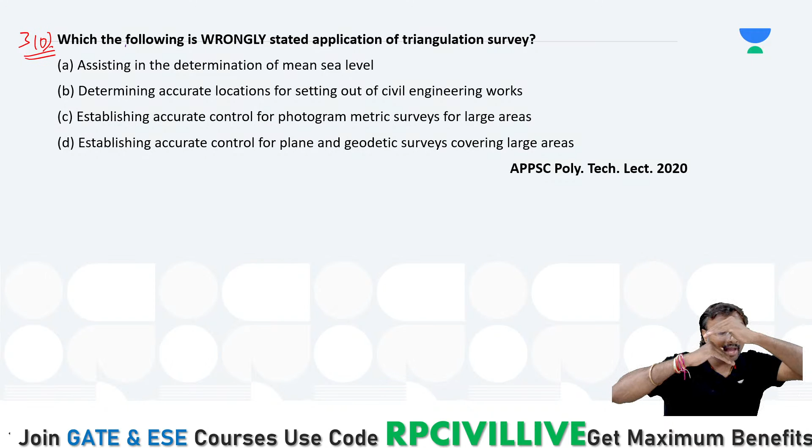Collimation surface is nothing but related to this line of collimation, right? The surface in which this line of collimation is lying is called your collimation surface, right? Anjanelu, the surface in which the line of collimation is lying is called the collimation surface, you can say, if you just observe, isn't it?

Assisting means helping. Assisting means helping.

Okay, so here if you just observe this, okay, first answer this question, I'll go back to that, okay, don't worry. First answer this question, everyone, I'll go back to that, okay. Anjanelu, answer this question first, I'll go back to that, okay, don't worry.

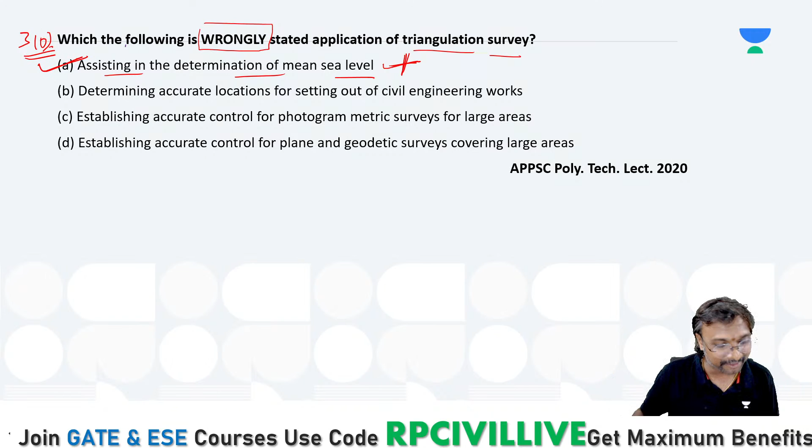Sorry. Are you going to determine the mean sea level, or with the help of mean sea level? With the help of mean sea level, we are going to find out the reduced levels, right? Using the mean sea level, we are going to find out the reduced levels, right? Are we going to find the mean sea level, everyone? Mean sea level, nobody is going to find the mean sea level, is na?

Nobody is going to find the mean sea level. Already that is existing, is na? With the help of this mean sea level, we are going to which one? This we are going to get others, is na?

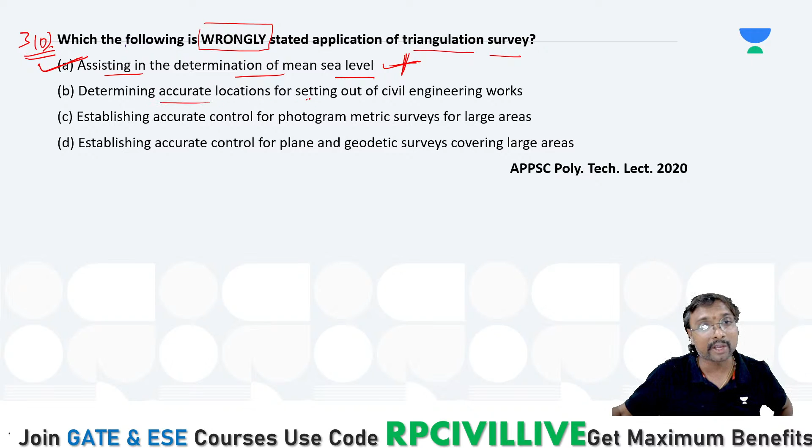Determining the accurate locations for setting out civil engineering works, yes, absolutely. Establishing the accurate control for photogrammetric surveying for large areas, yes, absolutely, photogrammetric. Establishing accurate control for plane and geodetic survey covering large areas, yes, absolutely, it is also correct, right? So which one is wrong then?

Assisting in determining the mean sea level, right? Are we going to determine the mean sea level? No, nobody. With any kind of leveling, we are going to calculate, we are going to estimate the levels, reduced levels of each and every point using the mean sea level, yes, na? So mean sea level we cannot determine, it is already existing.

Now here mean sea level is nothing but, you are right, if you just observe, this is your level surface, you can say, right? This is your horizontal surface, right? This is your which one? This is a level surface.

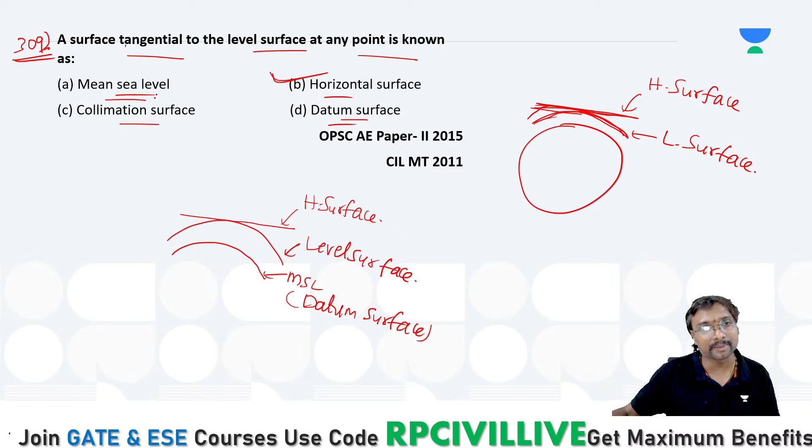Collimation surface is nothing but, whenever you are keeping the instrument here, this is a line of collimation. Whenever you are observing through this, through your eye like this, this is your line of collimation. The surface in which your line of collimation is present, that is your collimation surface, if you just observe, isn't it?

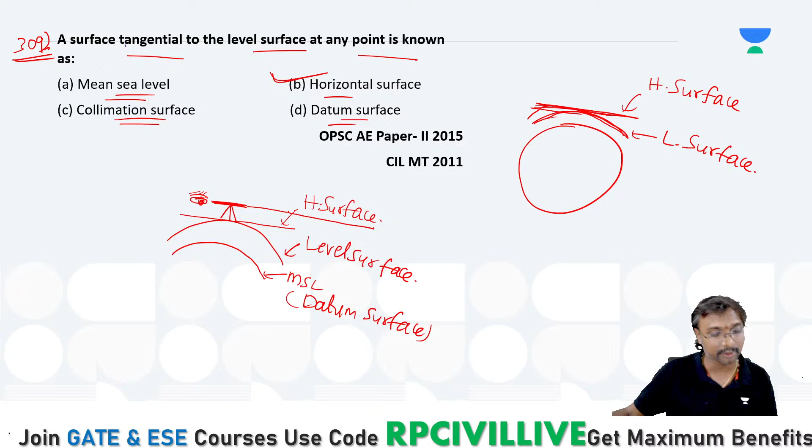Like that, Anjanelu, is that clear? Let's select the answer for this 311 question.

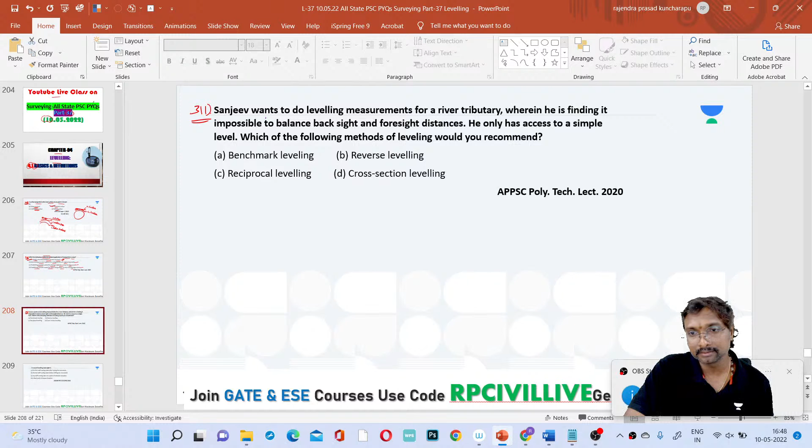Is it buffering? Now also it is buffering. One second, one sec. Now check it, everyone. It is working. Now it's working, everyone, just check it. Now it's working or not? Yes.

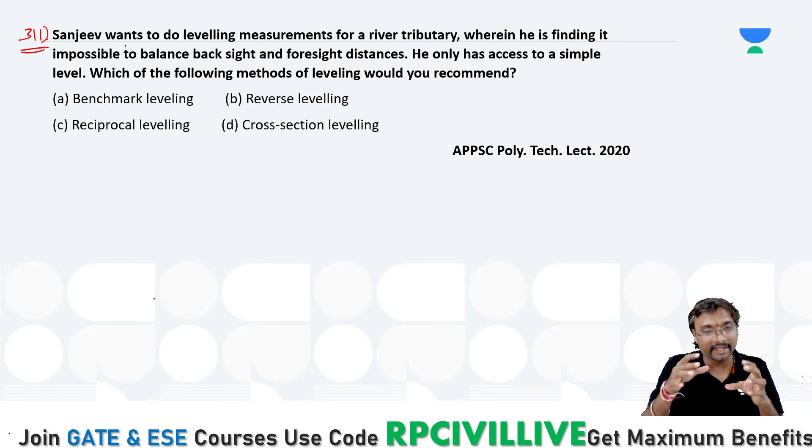Yes, it can be tangential to both the horizontal surface and level surface. Horizontal surface is nothing but, wherever you are standing, with respect to the earth, always it is horizontal. So now select the answer for this question, all of you.

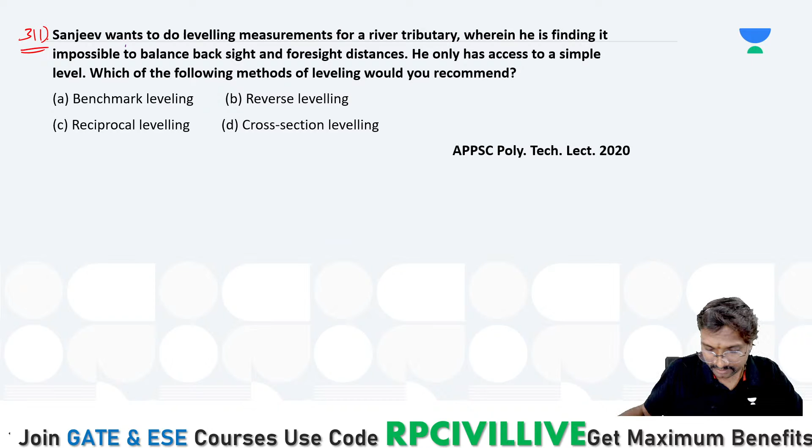Now it is okay or not? Now it's okay or not okay? Select the answer, all of you, if it is okay. You are getting sound disturbance also. Everybody is getting the sound disturbance. Is everybody getting sound disturbance, all of you? Is everybody getting sound disturbance?

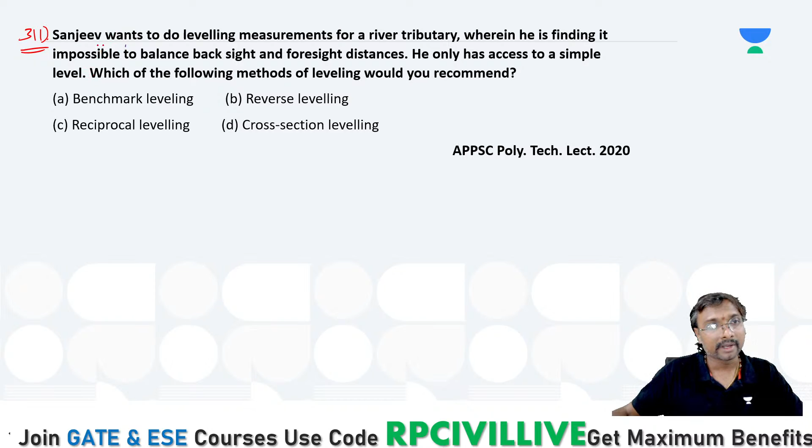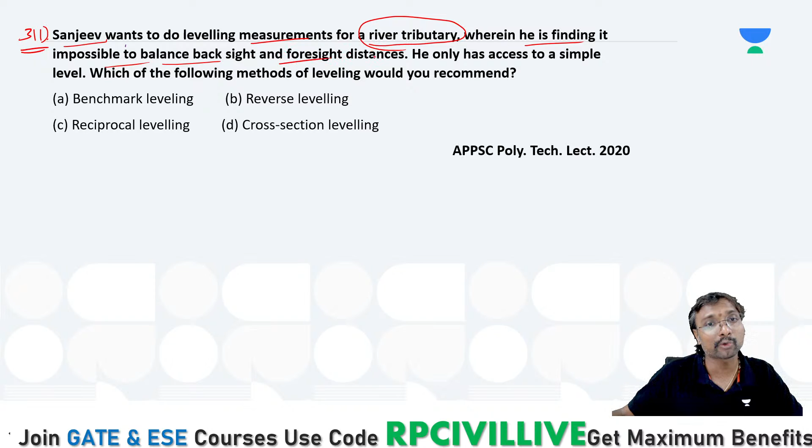Sanjeev wants to do leveling measurements for a river tributary, wherein he is finding it impossible to balance the backsight and foresight distances. He only has access to a simple level. Which of the following methods of leveling would be recommended? In case of this, which leveling is recommended?

Whenever a river comes, reciprocal leveling is recommended, yes. Absolutely, reciprocal leveling is recommended. Already we have mentioned many times, right? Now this is 312 question, select the answer.

Tirtharaj said A, Anjaneyali said A, and any other answer by others? What is your answer, Lina? A? Yes.

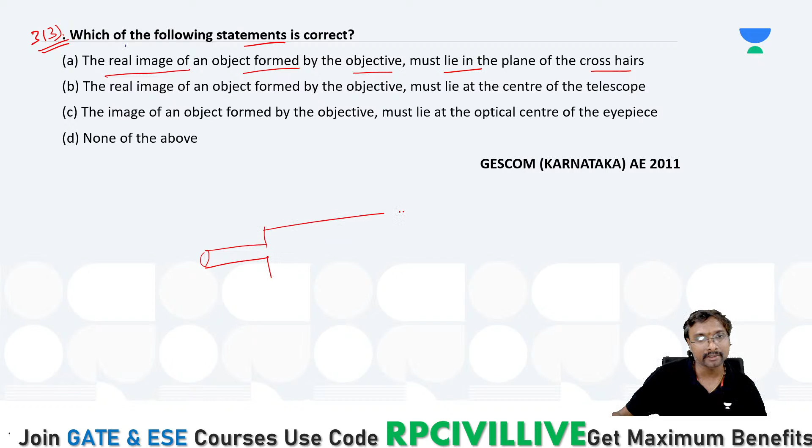Yes, so this is your which one? This is your eyepiece, and this is your objective, right? This is your objective, and this is your eyepiece, and this is your diaphragm where the crosshairs are present, right? Yes or no? Where the crosshairs are present, right?

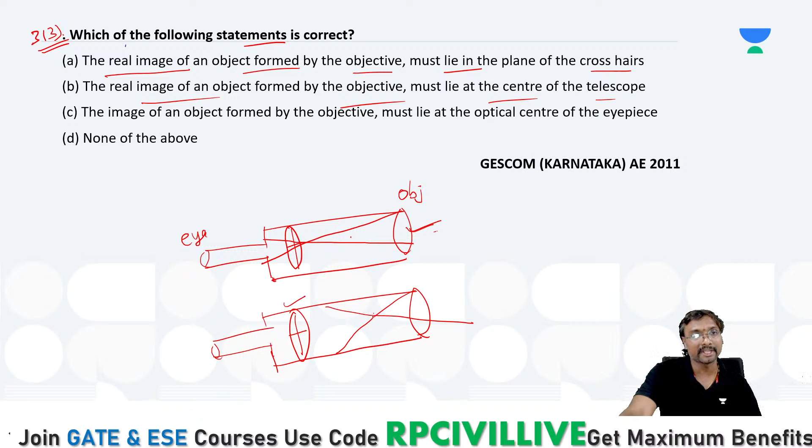So it must be at which point? It will not be at the optical center of the eyepiece. It must be falling at the crosshairs, otherwise parallax will occur. So that we can target the object with the crosshairs and get the exact staff reading. It must be falling on the crosshairs, or diaphragm, you can say.

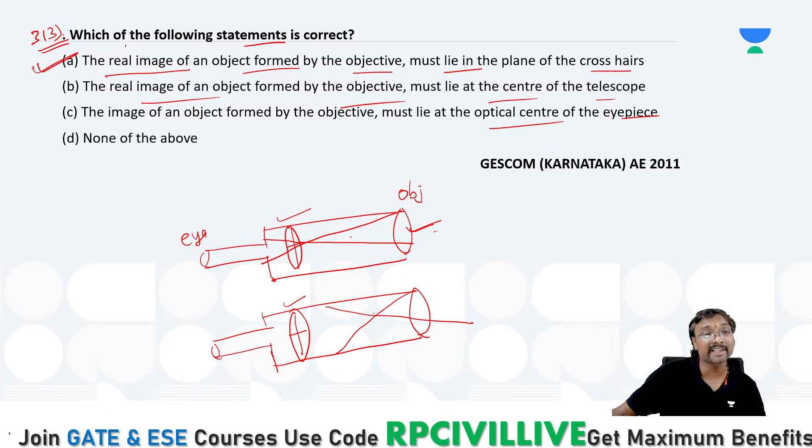Which Karnataka? Where is Karnataka? Okay, this is Karnataka, okay, you are asking.

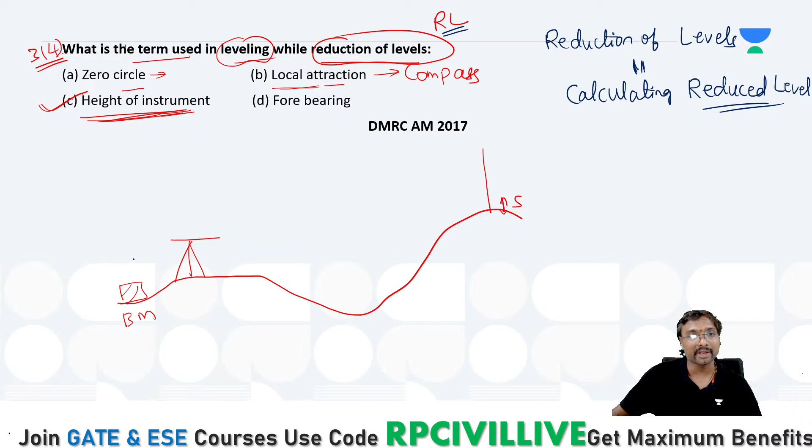Right, so now what can you say if you just observe it? This is your benchmark, backsight we are taking, this is your backsight we are taking. And what we are doing here is we are just getting this angle of elevation.

Somewhere you are having this, right? This is your angle of elevation alpha, and that is your staff reading. Yes, we have taken it. That is your staff reading, if you just observe. And what is this vertical ordinate? This vertical ordinate is your V, if you just observe.

Then what is the reduced level of this point B, if you just observe? This is the reduced level of this point B here, na. What is that you can say? Benchmark reduced level plus backsight, so you will be getting this particular point level, right? This is your B1 point level. So plus what we need to do? Plus V minus, yes, we have to make it, right?

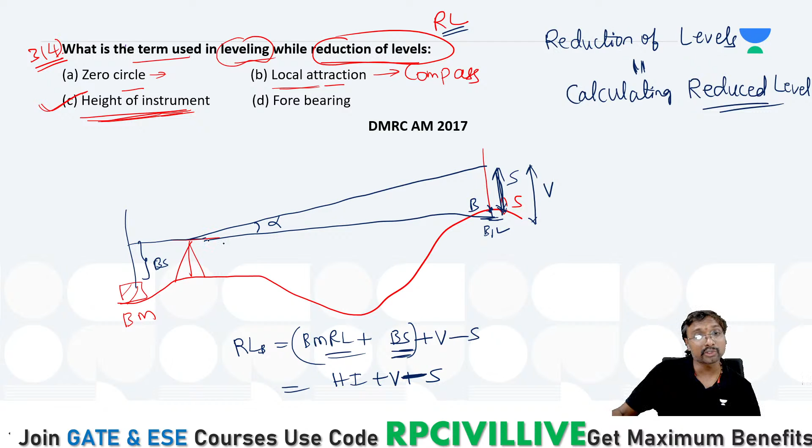It's not this backsight. Benchmark reduced level plus this backsight is representing this height of instrument only now. Height of instrument plus this V minus this, isn't it? So benchmark reduced level plus backsight means it will give the reduced level of this line of collimation. That reduced level of this line of collimation is called your height of instrument, right? So which one are we using now? Is it not the height of instrument? Yes, it is height of instrument, right?

This forebearing and local attraction, these two are related to compass, na? Yes, these two are related to compass, not related to leveling, if you just observe, isn't it?

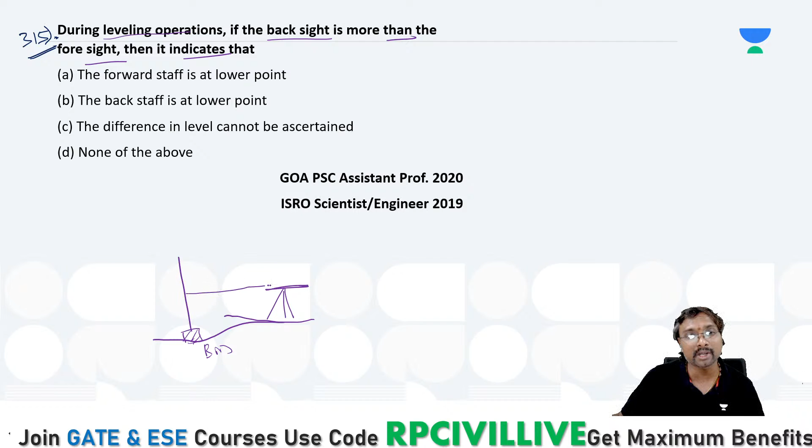So backsight is which one? This backsight is more than the foresight. Now, whenever the backsight is more than foresight means, let us say this is your benchmark reduced level. Then what is that you are getting? You will be getting this much amount of this backsight, and you will be getting this foresight, right? For this, what is that you are getting? You are taking this foresight, right?

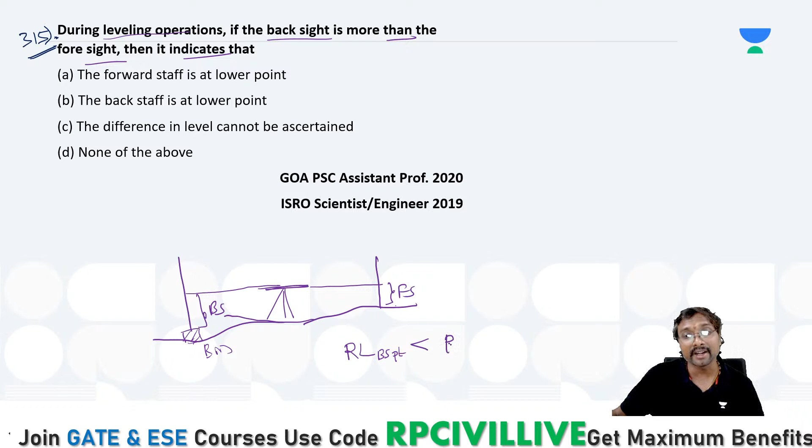Foresight is lesser, backsight is higher, means whose reduced level is at higher elevation? Reduced level of this backsight point is lesser than the reduced level of this foresight point. So now which one is lesser? The backsight staff is at a lower point, absolutely right. Option B is correct now, right?

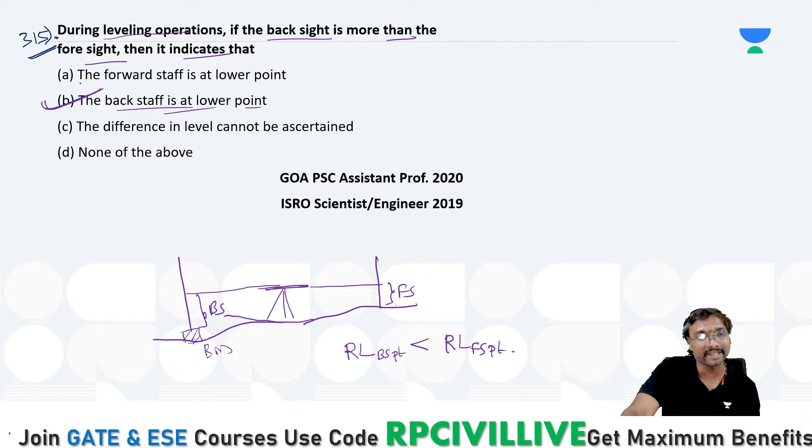Anji is from Telangana, so he is not writing AP examination, it seems. Are you writing AP examination, Anji?

Select the answer for this 316 question, everyone. D. Ram Akbal said D. Lina said A. Tirthraj said A. Vishnu said B. Line of sight is inclined, right? Line of sight is inclined, that is option C.

Tell me everyone, when the bubble of this level tube of a level remains central, right? Whenever it remains central, what is that? Line of sight is horizontal, axis of this telescope is horizontal, line of sight is inclined, and geometrical axis of the telescope is horizontal, right? It is line of sight is horizontal now, absolutely. Yes, line of sight is horizontal, right? Whenever that line of sight is horizontal, then only your bubble will come to the center.

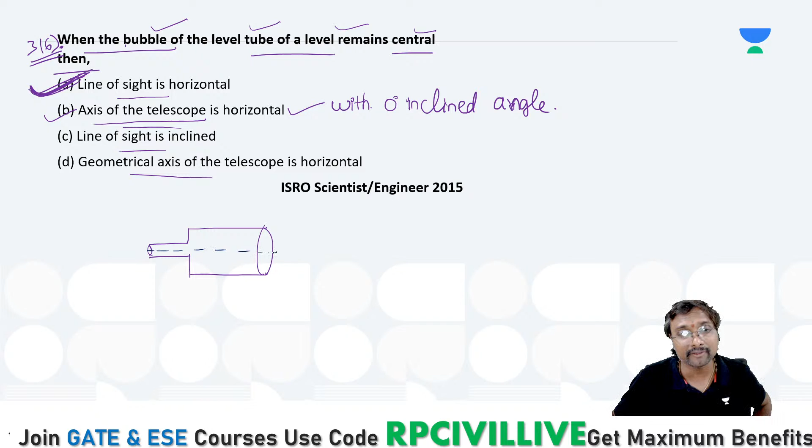Which one is the axis of this telescope? It is the center of this eyepiece and center of diaphragm to the center of the optical center of this objective. This is your objective glass, this is your eyepiece, and this is your diaphragm, right? This is your diaphragm with cross hairs.

So center of this eyepiece, center of this diaphragm, and center of this objective glass, all the three are connected by one line. What is this line connected called as? This is your axis of this telescope.

This is the axis of a telescope. Now what is that line of sight, if you just observe? You can say that line of sight is nothing but joining the optical center of the objective and the center of this diaphragm cross hairs and the center of the eyepiece and the target point.

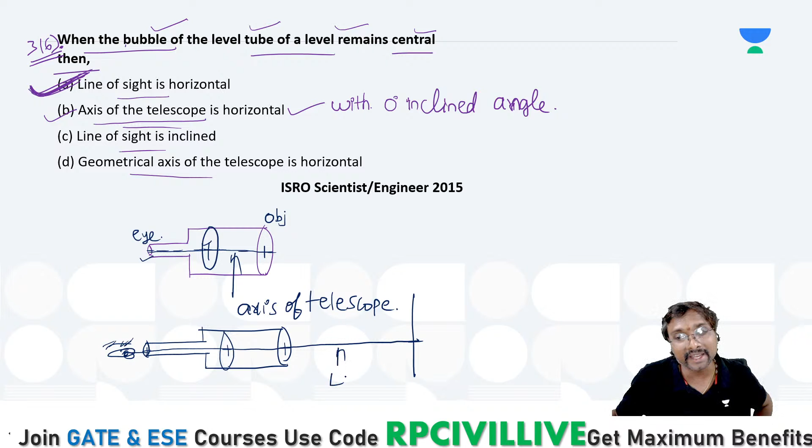This is called, when you are seeing through your eyes, from your eyes to center of this eyepiece, center of this diaphragm cross hairs, and center of this objective glass, and the target point. This is your line of sight or line of collimation.

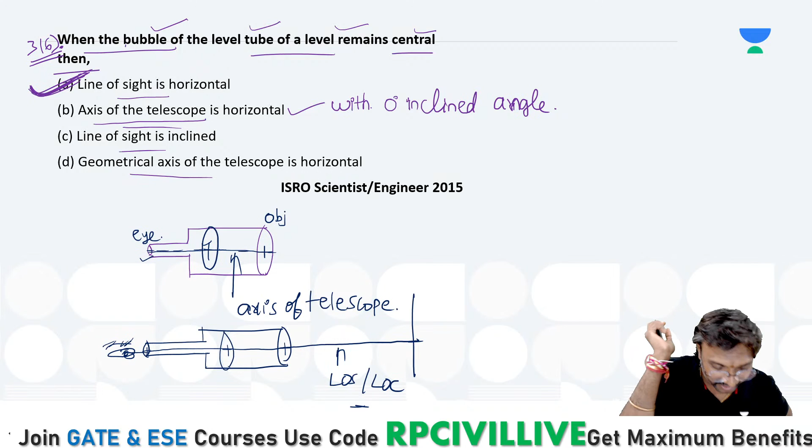Line of collimation, right. Now tell me, is it clear? Line of sight is horizontal, right. Whenever this line of sight is horizontal, we can say the geometric axis of this telescope is horizontal.

Because that level tube, where it is connected, if you just observe, when the bubble of this level tube of a level remains central, then the line of sight is horizontal, or the axis of telescope is horizontal. Line of sight is inclined, geometric axis of this telescope is horizontal.

What is the geometric axis of this telescope? If you just observe, geometric axis of the telescope is nothing but this one. This is only the same. Geometric axis is nothing but your center.

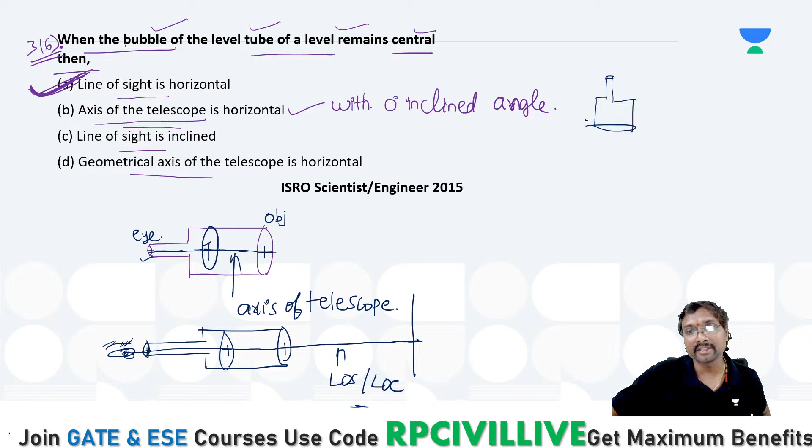Whenever you are having this telescope, first we will be placing that telescope in this manner, with this A frame and all these things. So the circles will come here and a tripod will come. This is your geometric axis of this telescope, the central axis of this telescope.

So it is no way related to this leveling. Line of sight is inclined, right. So if you just observe, option A and option C, can they be the answer, or will any one of them be the answer?

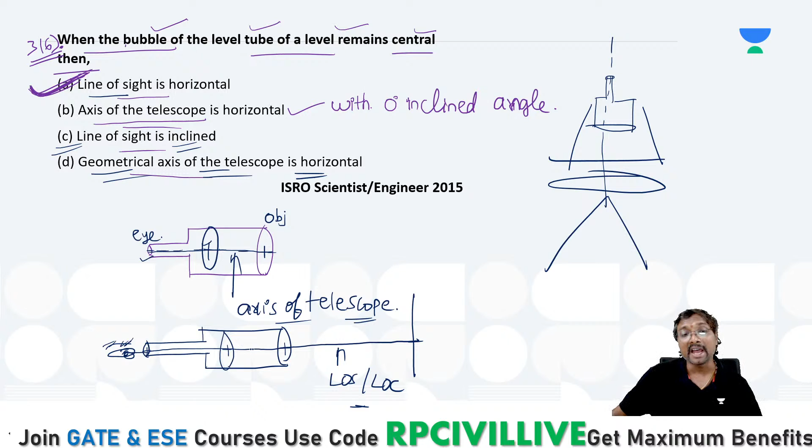Yes, extension of this, yes Lina, correct, right? Extension of which one? This axis of telescope, extension of this axis of telescope towards this target object is the line of sight or line of collimation.

Is it not the extension of this axis of telescope beyond the objective glass, beyond the optical center of the objective, up to the target point, that is called your line of sight or line of collimation? Line of sight means the line through which we are observing, that is sight. Sight means observation, visibility - the line through which we are seeing or observing, that is your line of sight. Okay, is that clear everyone?

The difference between the line of sight and axis of telescope, is that clear all of you? Difference between the line of sight and the axis of telescope, is that clear everyone? Clear or not?

Tirthraj, is it clear? Right, now once it is clear, tell me, whenever this line of sight is horizontal, is the bubble tube horizontal, or when the axis of telescope is horizontal, is the bubble tube horizontal? Which one, tell me?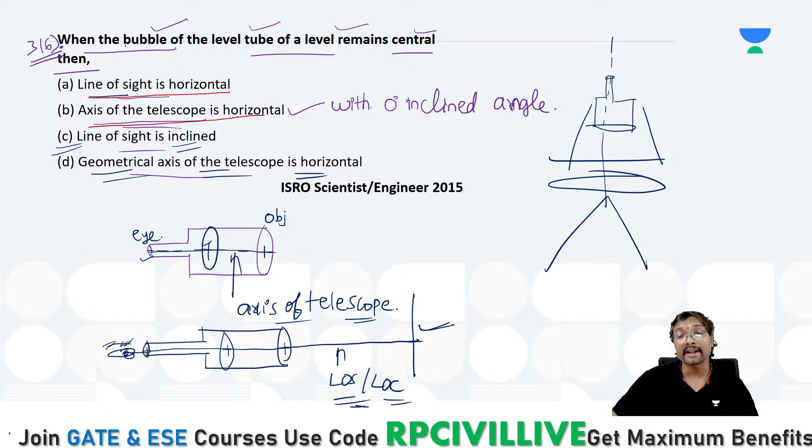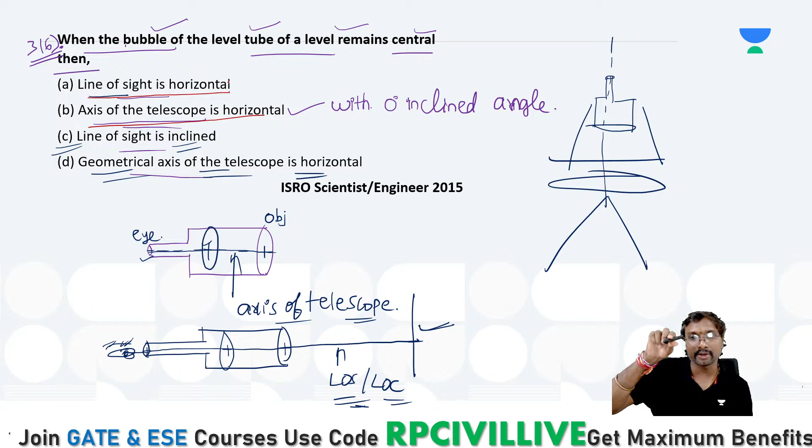See, by default, whenever you are taking the readings, we have to consider the dumpy level. Whenever you are taking this dumpy level, always it is horizontal only, no? By default, a level means what? It is generally which level? Dumpy level, right.

Whenever it is this dumpy level, do you understand the question all of you? Option A or B, which one is correct? I'll tell you.

Dumpy level is nothing but always having this telescopic axis horizontal, right? Can it be inclined, or is it not possible to incline? It is not possible for this telescope to be inclined. We cannot move it upward or downward though. You have to assume, for a level meaning by default a dumpy level, that it is always horizontal.

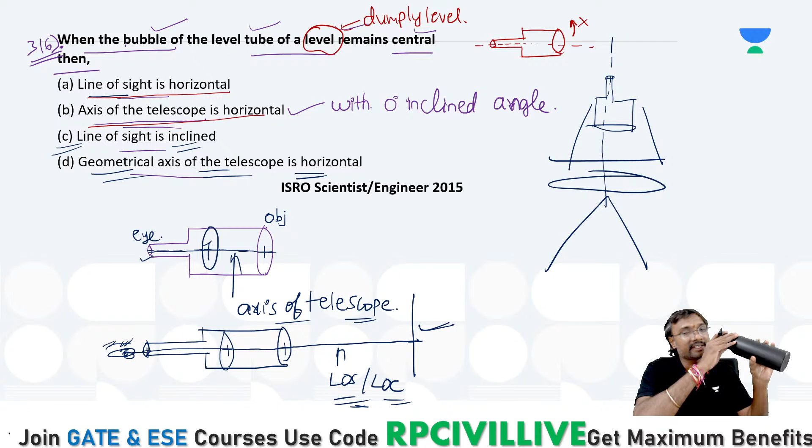That is what we have to assume, right? Then automatically the axis of this telescope - suppose if the leveling is not done properly, it will come down as the instrument moves down. If it is done properly, it will come horizontally like this. So when this axis of the telescope is horizontal, automatically the line of sight is also horizontal.

So can we say option A and option B both are correct? Option A and option B both are correct, if you just observe it. But which one is more correct, everyone? Both are correct answers only, there's no doubt in that.

But if you wanted to give more mileage, which one can you give it to? Both are correct - line of sight is horizontal, axis of telescope is horizontal. If you wanted to give more mileage, you can give it to the first one, because if the line of sight is horizontal, by default the axis of telescope is also horizontal. So you can give more weightage to this first option.

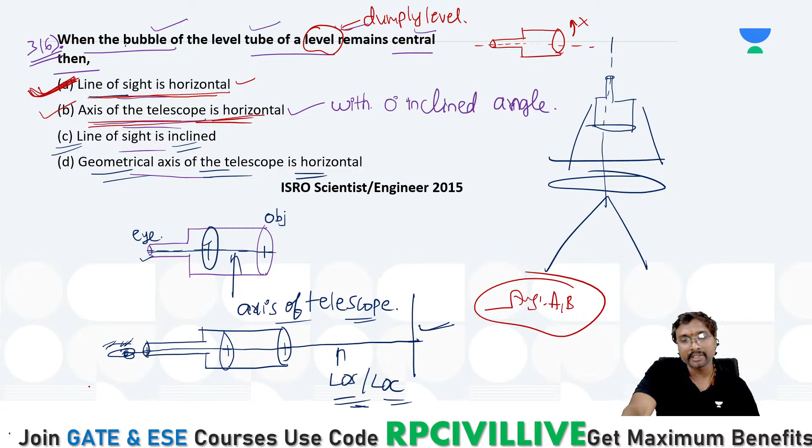Is that clear, everyone? So today's last question I'll be solving - question 317. After this question we'll stop. Select your answer.

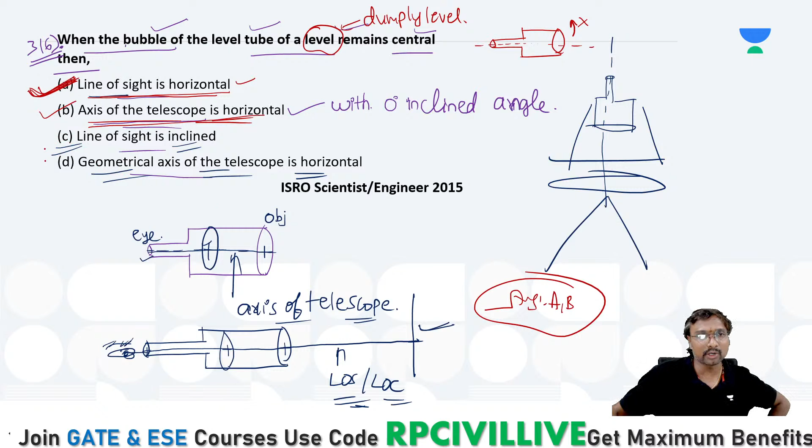D is wrong absolutely, right? There is no axis called the geometric axis of this telescope. We don't have any use of this with respect to the bubble. We do not have any use of this geometric axis of the telescope with the bubble, so both are not related. We don't define any relation between them. That is why option D is wrong.

A method of differential leveling is used in order to find the difference in elevation between two points when they are too far apart, when there are obstacles between the two, or when the difference between them is too great - all of the above, right? Which one can you go for? All of the above are correct.

So whenever they are having a larger distance between them, we have to go for differential leveling. When an obstacle is present between them, we need to move from here to here. And when the difference between them is also too great, we can go for it too. So points having larger distance, larger difference in elevation, or some obstacle - everywhere you can use differential leveling. Do you have any problem? Tell me.

Vishnu, do you have any problem in application of this differential leveling here? We do not have any problem in application of differential leveling. Differential leveling is simply taking the levels, changing the instruments - shifting the instrument many times and taking the levels, that's it. So whenever they are far away, we'll be shifting the instrument many times because that long distance is not visible. Whenever there are obstacles between two, what do you need to do? First we need to keep the instrument here, then change the locations. And when the difference between them is also very high, same thing applies.

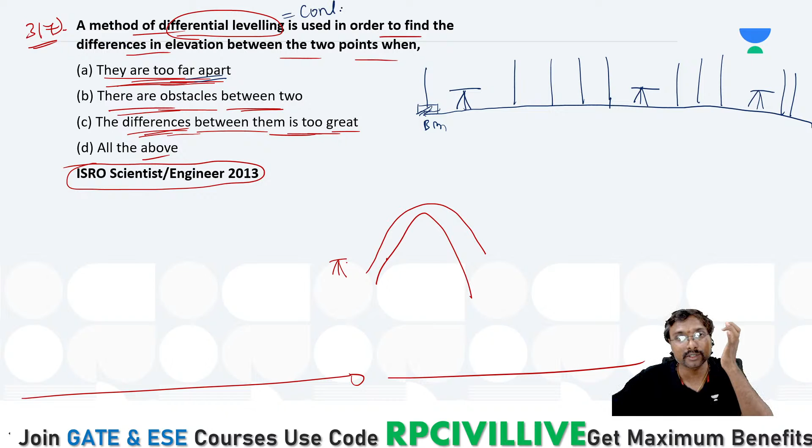Generally, there's another name for this. What is that other name? Another name for differential leveling is continuous leveling, or continuous or compound leveling.

The name itself tells us we can use it when the points are apart from each other, when there's a large distance between the two points. This is your point A and this is your point B. If you want to find the relation between them, the difference of elevation between them.

When the points are very far away from each other, we have to take many continuous readings. And whenever there are obstacles between the two points, suppose in the plan this is point A and this is point B, with some hill present in between.

So whenever that hill is present in between, what can we do? We can take the leveling at these points. At this point we take leveling, at this point we take leveling, and we go on taking leveling at this place, and this place, like that. What is this called?

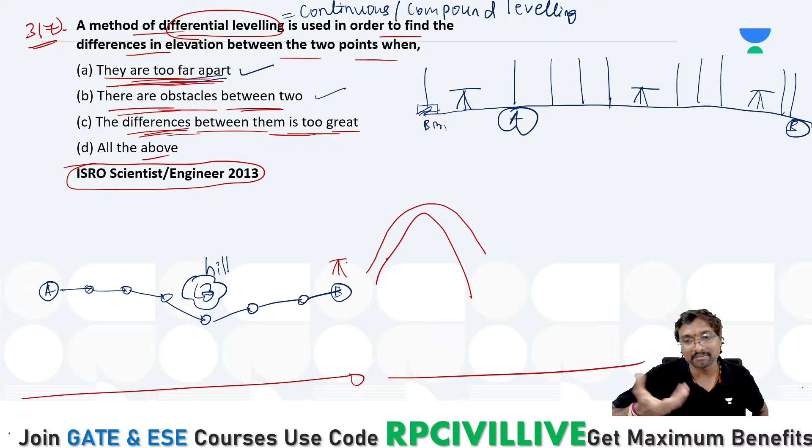This is continuous leveling. Anjanelu mentions lower and upper level - that is also correct. When you take continuous staff readings or many staff readings, it is called differential leveling. So when the points are very far away from each other, you require more staff readings. Whenever there is an obstacle present, you also require more staff readings.

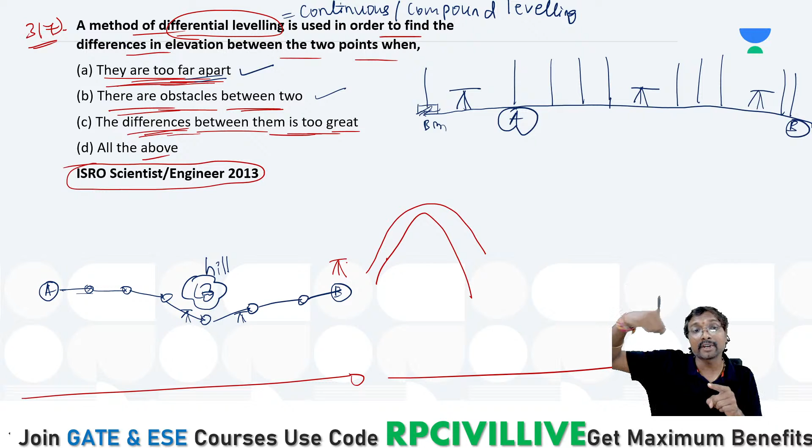You will be shifting the instrument here, yes, absolutely right. Then here also it is possible, and the difference between them is also very large. What do we need to do? We need to shift the instrument many times, and we need to go for many staff readings.

All of these are correct. Yes, all will be correct. Vishnukant, is that clear now?

Yes, taking staff reading on both sides - continuous means up and down and many number of readings. Back side, forward side, back side, forward side - we are taking readings on both sides.